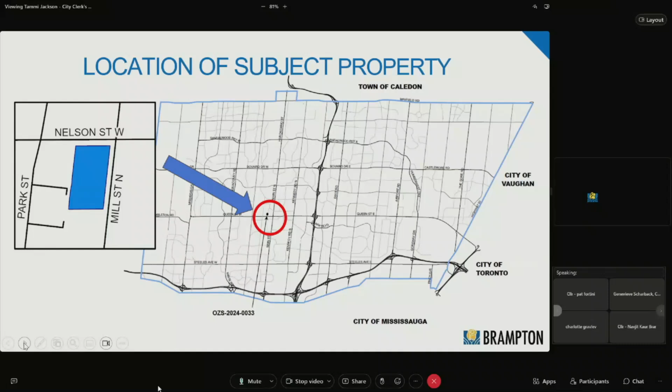Next slide, please. The lands are located in Ward 1. The proposal consists of a consolidation of 8 lots, municipally known as 17, 19, 21, 23, 25, 27, 29 Mill Street North, and 53 Nelson Street West. The site is located south of Nelson Street West and west of Mill Street North. Next slide, please.

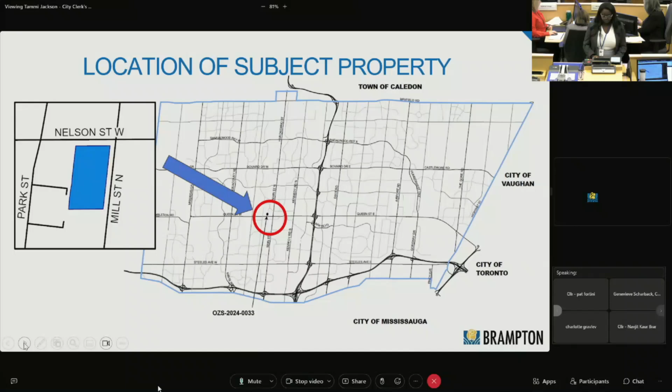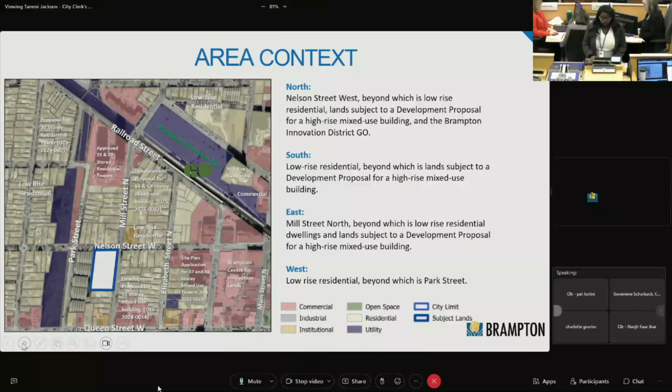This is a closer aerial view of the subject property and surrounding area. As you can see, the site resides on existing low-rise residential lands. Please note that this application was previously brought to public meeting on June 17th, 2024. Next slide, please.

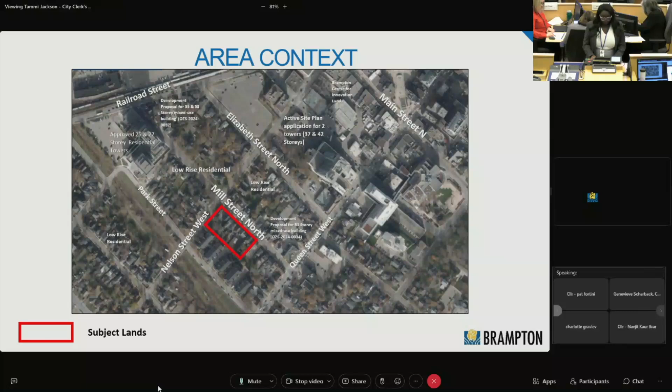The applicant has submitted an application to amend the official plan and zoning bylaw in order to facilitate a residential intensification development of a 45 and 48-story mixed-use building with a total of 915 units varying in sizes ranging from 1 to 3 bedrooms. 310 parking spaces are proposed.

550 bicycle parking spaces are proposed. An indoor amenity space of 1,508 square meters and an outdoor amenity space of 1,120 square meters. The proposed gross floor space index is 14.64, and the proposed net floor space index is 16.83. There is also proposed to be commercial space of 840 square meters.

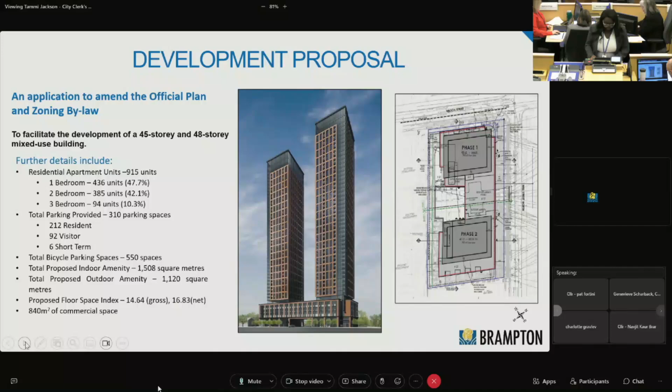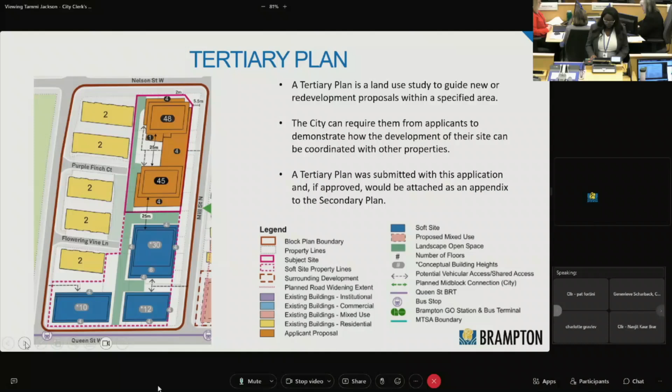A tertiary plan is a land use study used to guide development proposals within a specific area. The city can require them from applicants to demonstrate how the development of their site can be coordinated with other properties. A tertiary plan was submitted for this application and, if approved, would be attached as an appendix to the secondary plan. Some key items that staff are currently reviewing as part of this tertiary plan include appropriate heights within the area, appropriate building separations and transition zones to the existing 2-story townhouses, and the appropriate location of the outdoor amenity space area.

Prior to finalizing recommendations to council, this application will be further evaluated for consistency with the Planning Act, provincial policy statement, the City of Brampton official plan, and the Downtown Brampton secondary plan.

The subject lands are designated central area in the City of Brampton official plan, which permits a freestanding or mixed-use development that includes a range of office, retail, and service activities. As such, an amendment to the official plan is not required for this application.

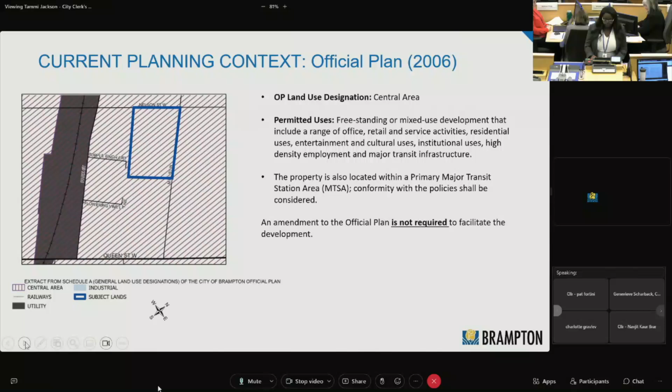Brampton's new official plan, Brampton Plan, was adopted by City Council in November 2023 and approved by the Region of Peel in May 2024. The updated August 2024 office consolidation incorporates the region's decisions and modifications. There are portions of Brampton Plan that are still under appeal, and the city is currently working on a consolidation to reflect these policies and schedules under appeal in the plan.

The subject site for the proposed official plan and zoning bylaw amendment are designated mixed use in Schedule 13B, and community areas, urban centers, and primary major transit station area in Schedule 1A. Please note that MTSAs are areas intended for intensification, and municipalities are required by provincial legislation to meet minimum density targets within the area. The location of the property is located downtown and is in close proximity to the Brampton GO Station. The mixed-use designation in Schedule 13B of Brampton's new official plan allows for increased intensification on the lands.

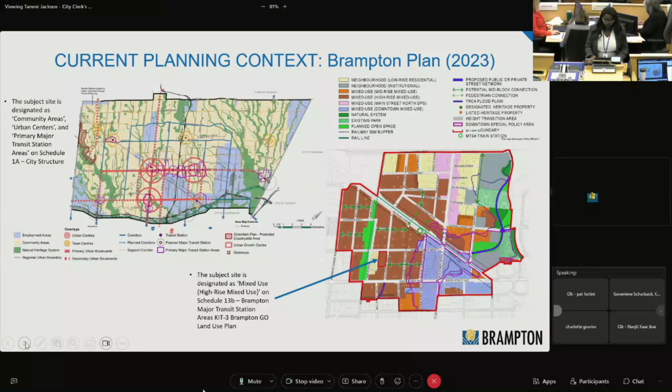The subject land is located within the downtown Brampton secondary plan and is designated medium density. The proposed development does not fall within the uses of the medium density designation, and as such, an amendment to the secondary plan is required to permit the proposed development.

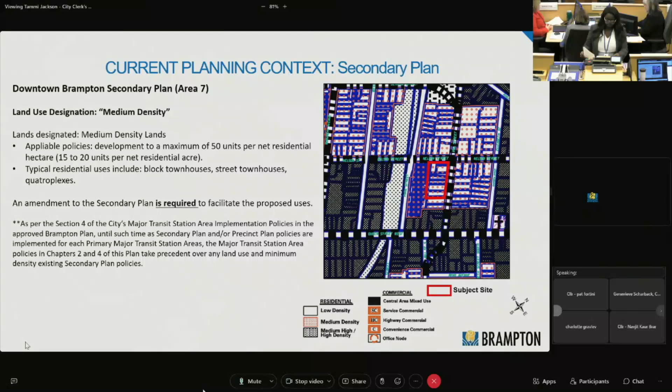The lands are zoned residential extended 1 zone as per the city's zoning bylaw. Land use permissions include low to medium density residential uses and other accessory uses. An amendment to the zoning bylaw is therefore required to facilitate the proposed development.

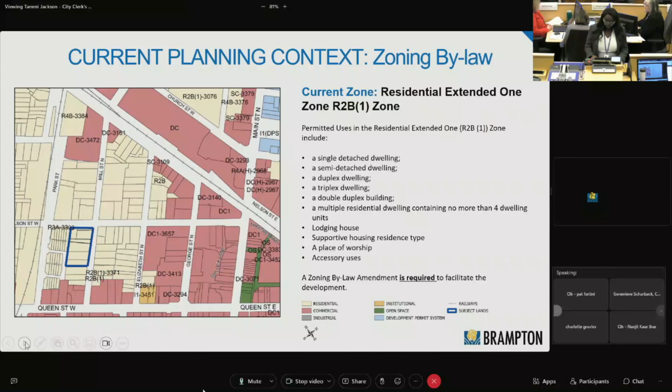As such, the applicant is proposing to amend the zoning bylaw from the current residential extended 1 zone to a downtown commercial zone with a special section. Some highlights of the proposed zone include an apartment dwelling, only in conjunction with an apartment dwelling or mixed-use building. The commercial uses proposed in the downtown commercial zone are allowed. A maximum tower floor plate of 750 square meters and a maximum building height of 155 meters, which is equivalent to 48 stories.

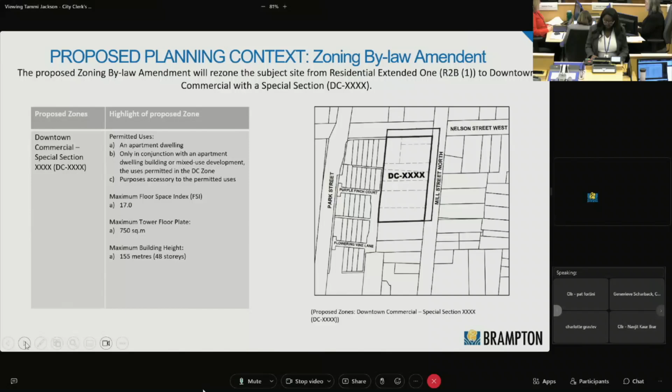At this time, preliminary issues and considerations that will need to be addressed include land use compatibility and the emerging MTSA framework. As stated before, the subject lands are within the MTSA boundary area. As such, staff are looking to ensure that the appropriate mitigation measures, building separation, and landscape buffers are sensitive to the existing 2-story townhomes within the area. This will be further examined through the tertiary plan process.

Building height, separation, and setbacks. The proposed development will need to ensure that appropriate height, tower separation, and building setbacks are implemented through the zoning bylaw amendment process and tertiary plan. Furthermore, staff are looking to ensure that the redevelopment potential of neighboring parcels within the block are not unreasonably impacted by the proposed development.

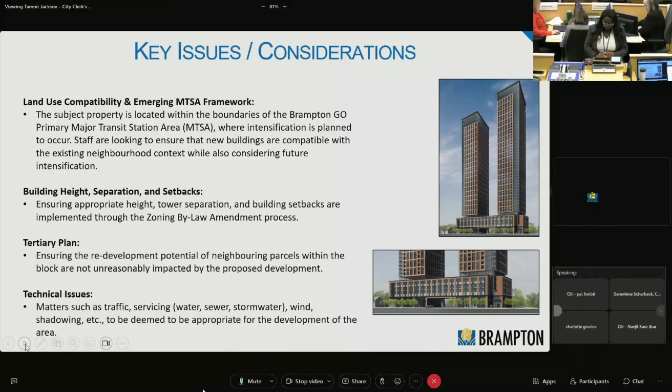Lastly, technical issues within this proposal. The proposed development must take into account the technical issues such as traffic, construction impacts, servicing, wind, shadowing, etc., to be deemed appropriate for the development area. These issues and others will be addressed in a further recommendation report.

Staff is hosting a statutory public meeting this evening to share information on the proposed official plan and zoning bylaw amendment on the subject site and provide an opportunity for members of the public to express comments, perspectives, and opinions. Staff will continue to review the applicant's planning rationale and supporting plans, drawings, and technical comments, and will advance a final recommendation report for council decision in the future based on the details of the proposed development and applicable planning laws and policies, while incorporating comments from community members, technical reviewers, and other stakeholders. Staff will also follow up with members of the public and other stakeholders who have spoken, written in, or advised of an interest in monitoring this proposal.

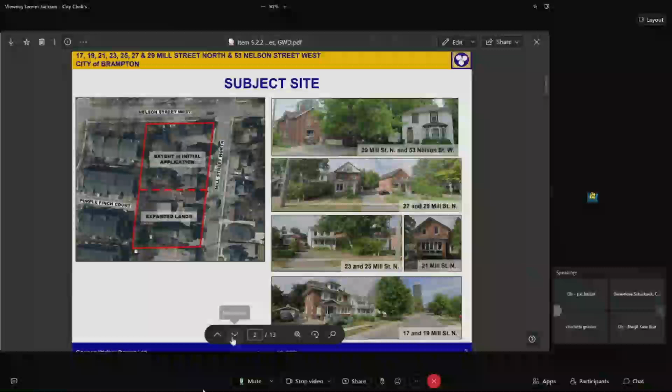Initially, the application consisted of 5 lots located at 23 to 29 Mill Street North and 53 Nelson Street West. The application has been expanded to include the properties at 17, 19, and 21 Mill Street. The land subject to the application now represents approximately half of the Mill Street North frontage between Queen and Nelson, and 25% of the block area bounded by Mill Street, Queen, Park, and Nelson Street West.

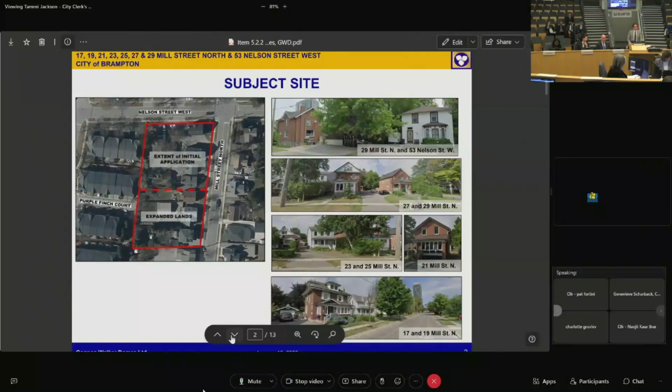Next slide, please. The subject site is located within downtown Brampton, which is the physical and cultural core of the city, and a strategic location for significant redevelopment and intensification potential, centered around the Brampton Innovation District GO Station and downtown Brampton Bus Terminal, which are located within 300 meters of the subject site.

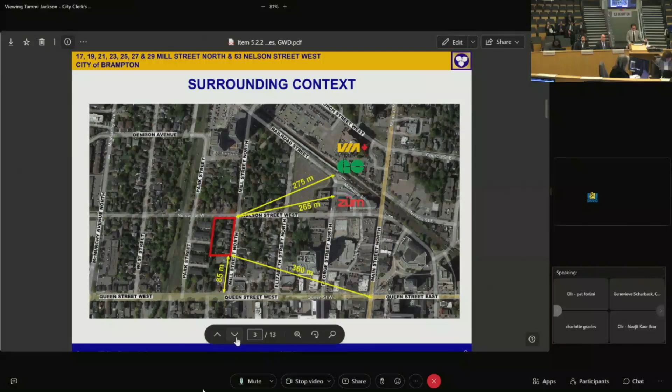Next slide, please. From a policy perspective, the site is located within the Brampton Urban Growth Centre and an MTSA, and along a regional intensification corridor. The subject site is located in an area of the city where the tallest buildings and the highest densities are planned. Next slide, please. The site is designated high-rise mixed use within the Brampton GO MTSA land use plan of the new Brampton plan. With the exception of the lands to the immediate west, the majority of the surrounding lands are planned for high-rise buildings.

Currently, no maximum heights are prescribed in the city's primary MTSA. It is the intent of the Brampton plan that the downtown area transition from its more suburban character to a more urbanized, mixed-use, transit-oriented community.

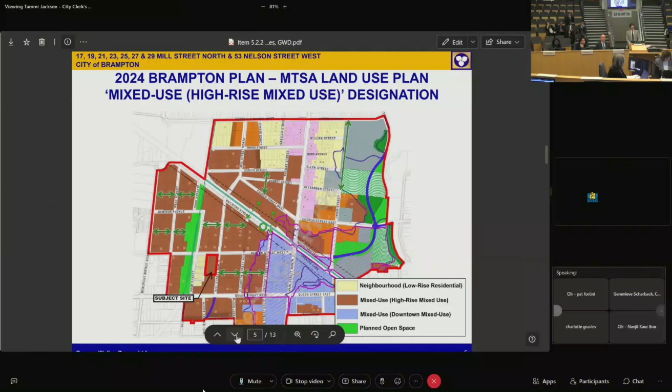Next slide, please. Initially, the application advanced one 48-story residential-only building oriented towards the intersection. It included 549 residential units, 35% of which were family-sized units, typically described as 2- and 3-bedroom units.

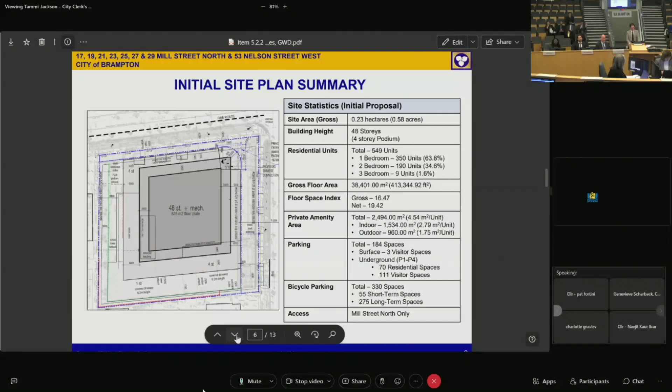Next slide, please. The expanded proposal advances an integrated mixed-use building comprised of 2 towers: a 48-story tower at the intersection with a 45-story tower to the south. It includes 915 residential units, planned to include a variety of unit types and sizes, including 52% that are now family-sized units. It includes 310 parking spaces, and access is limited to Mill Street North. Road widenings are contemplated along Nelson Street West and Mill Street North. Next slide, please.

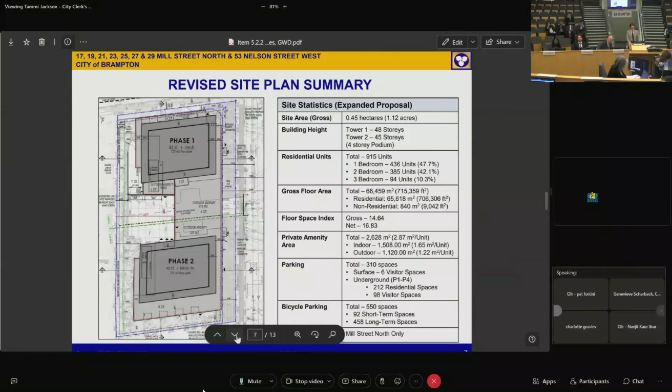A 0-meter lot line setback along the subject street frontages is proposed post-widenings. Along Nelson Street, the building podium has been pulled back from the west lot line to provide a 7.5-meter landscape setback along Nelson Street West.

This separation provides a physical transition between the existing townhouses to the west and the proposed development. 2-level townhouse-style units have been integrated into the base building along Nelson Street, identified in the blue hatch on your screen. A defined commercial entrance has been strategically located at the intersection of Mill Street North and Nelson Street West.

The 9,000 square feet of non-residential space now proposed within the development may accommodate some form of retail or other dynamic non-residential use to support the city's efforts in the promotion of the Brampton Innovation District and the mixed-use downtown vision.

Along Mill Street North, 2 residential lobbies have been located on either side of the primary accessway to serve each tower independently. An additional non-residential commercial space anchors the south edge of the Mill Street frontage.

Along the south lot line, the setback to the building has been increased to 5.5 meters, and 2-story townhouse-style units with at-grade entrances have also been incorporated along this edge of the building podium.

Along the west lot line, a 7.5-meter building setback is proposed to the base building podium, which increases to 24.5 meters, where the podium has been notched out to facilitate the internal service courtyard.

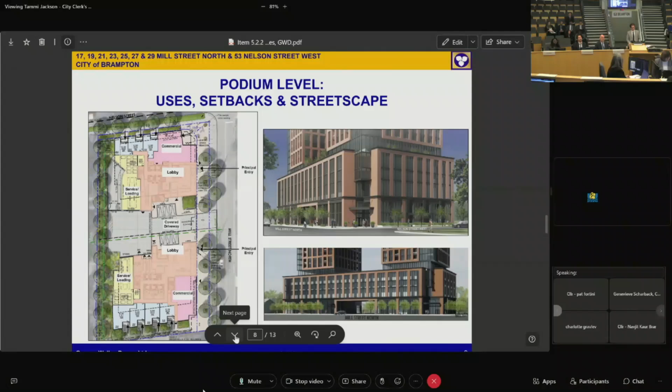Above the 4-story podium, the towers have been stepped back to ensure that the base building podium reads as the primary defining element from the adjacent public realm.

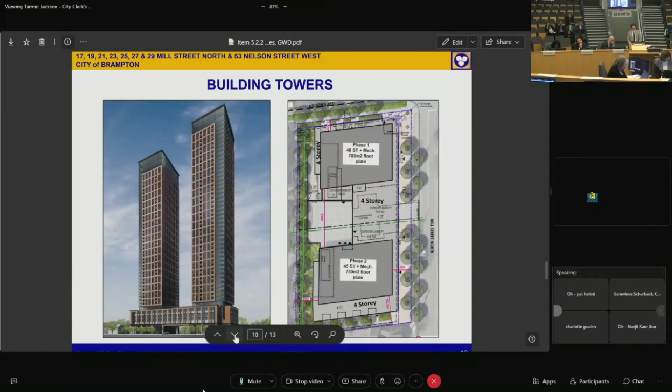A 25-meter tower separation distance has been provided between the 2 towers, along with slender 750 square meter floor plates. The combination of tower separation and smaller floor plates shall result in slimmer and faster moving shadows to minimize shadowing impact on adjacent properties. Tower elements have been set back a minimum of 10 meters from the west property line and 12.5 meters from the south property line.

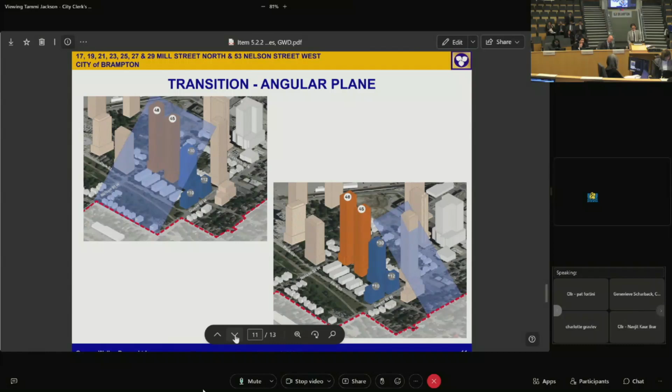An angular plane assessment was prepared to analyze the proposal's built form transition from the limit of the MTSA boundary, where the more stable residential neighborhoods are located. The angular plane analysis shows that development, shown in orange, falls beneath the 45-degree angular plane. On the last slide, the changes between the initial proposal and the expanded proposal are highlighted.

Happy to answer any questions.

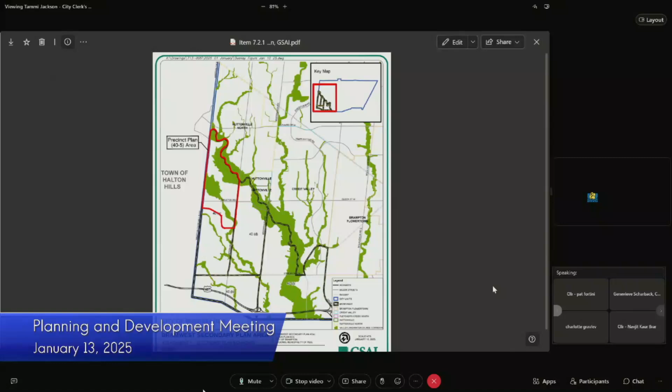The Block 40-5 landowner group owns several properties within the block plan area, which is within the Bram West secondary plan area. We estimate they own approximately 50% of the net developable area within the block. As you can see on the screen, the block area is outlined in red. It's located in the northwest quadrant of the secondary plan area, generally centered along Embleton Road and Winston Churchill Road to the west and Heritage Road to the east.

The landowner group is actively working towards a block plan application, and they intend to redevelop and redesignate these lands for a mixed-use community. I'm here today on behalf of the landowner group to provide background information, as well as provide support and our comments on the staff report.

For some context, we've been working with various landowners within this area for almost a decade now, trying to advance a block plan application. More recently, we attended a formal pre-consultation meeting in September of 2024 to advance a formal precinct application. However, the advancement of a formal block plan application over the years has been halted or paused for various reasons, which are all outlined in the staff report, namely the Highway 413 environmental assessment and the Heritage Heights secondary plan appeal. Our team has been patiently and cooperatively working with city staff while these various obstacles and items have been addressed or are working towards being addressed.